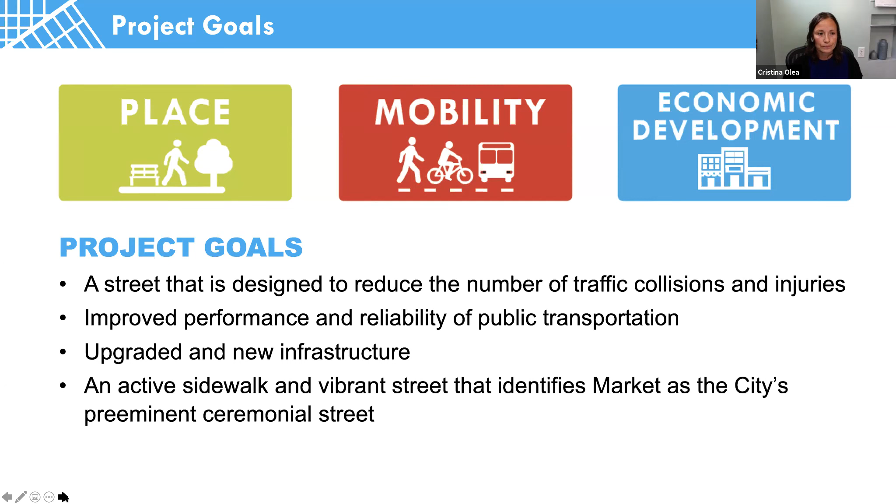We do have some difficult design changes that we're presenting this month to our stakeholders. Those changes were not made lightly and are based on a few different things that have happened since the last time that we met. As you know, in January, Market Street went car-free as part of our implementation of Quick Build.

Immediately following Quick Build's implementation, we saw up to 12% reduction in Muni travel time. And we also saw a 25% increase in cycling along the corridor. That was until shelter in place was ordered. But we were seeing up to 800 bicyclists in the peak hour.

This growth of bicycle volumes on Market Street made it very clear to us that our proposed 8-foot sidewalk level bikeway would be under capacity from day one. That 8-foot bikeway narrowed often to 5 or 6 feet at pinch points like BART Muni entrances, loading zones, and where we had center boarding islands. So we knew it wasn't going to be adequate.

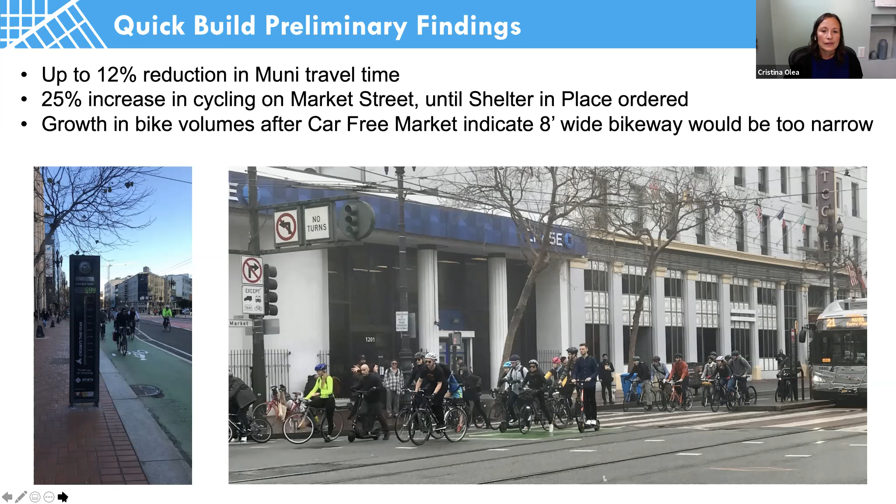We were also hit by COVID-19, and our city has been devastated by its impacts. The economy along Market Street and throughout the city has been severely impacted. Our city budget has also had dramatic impacts because of COVID-19.

Our reevaluation of our design has helped us realign the design with the available funding for this first phase of construction. We also have a much smaller transit system right now, transit operations, when it was reduced to the core service plan. And even though lines have been added back, we are still under a reduced service plan.

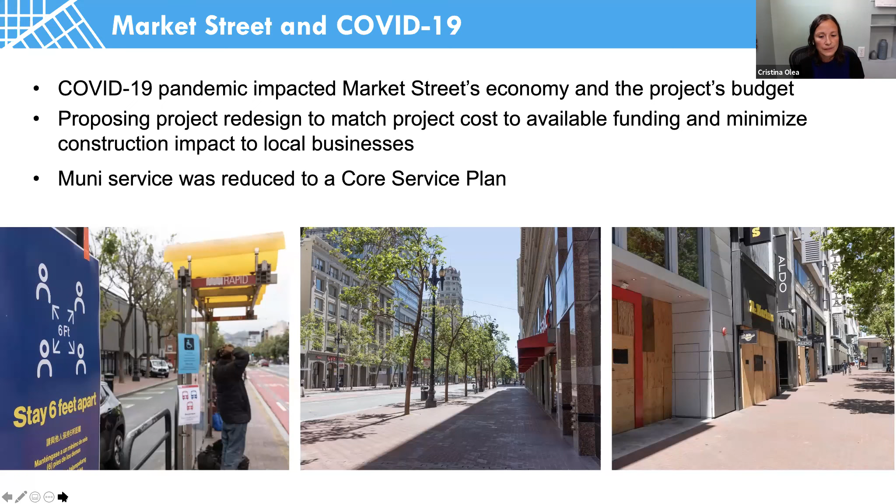The third consideration as we looked at Better Market Street was trying to minimize impacts to our local businesses from construction and to support their recovery post-COVID-19. Some of the key strategies to do this are keeping the existing curb line as much as possible, replacing all of the curb ramps to meet our standards, but limiting the sidewalk replacement to only where it's needed most, and replacing broken bricks mid-block. We've also decided to defer or delay replacement of the Path of Gold poles and the traction power duct banks, since they still have 10 to 15 years of useful life. This work, the utility relocation and replacing the brick sidewalks, really were adding to the construction duration and would most significantly impact businesses.

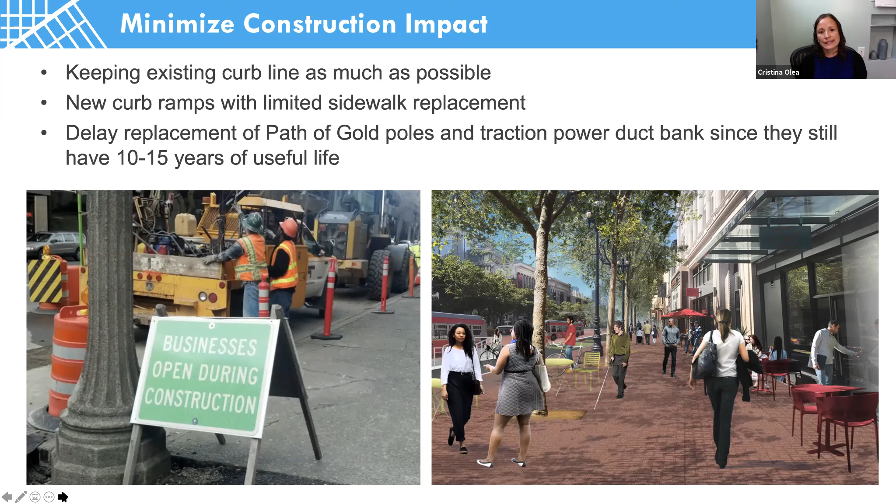Shifting gears now to the design itself, we're going to start at UN Plaza and describe some of the transit improvements that we're proposing. One of the biggest changes to the 2020 design is that all transit will operate in the center Muni-only lanes. So the F line and all of the bus routes will share that center lane. This means that there will be no Muni service in the curb lane and no curbside transit stops, which eliminates conflicts between buses and people bicycling, and also eliminates conflicts between passengers and the bikeway.

All the center boarding islands will be fully accessible with the mini high platforms for people in wheelchairs and with disabilities to board the F-line trains. And the islands themselves will be twice as big. They will be wider and longer, wider to accommodate more passengers and longer to accommodate more buses at each of the stops.

Passengers will cross to the boarding islands at signalized crossings. As you can see here, this mid-block crosswalk between UN Plaza and 1155 Market is fully signalized today. All the traffic signals will be fully upgraded as part of Better Market Street, and any passengers waiting to get to and from the center island would cross at this signalized location.

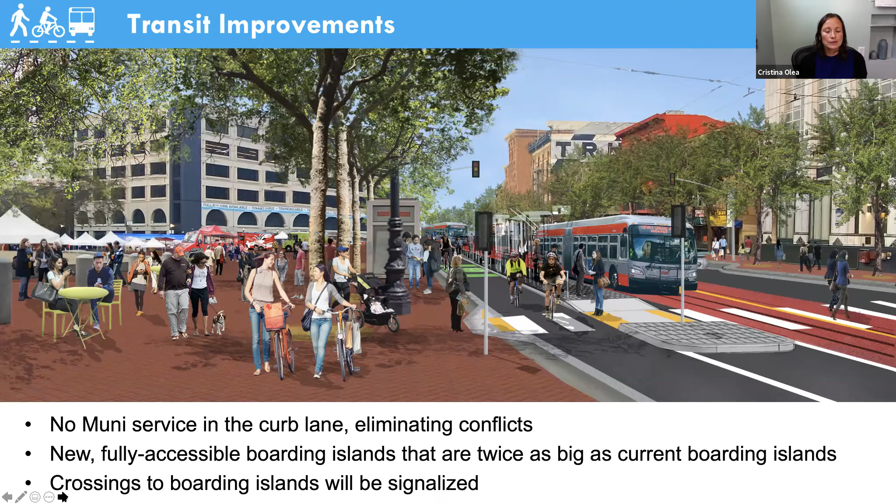With transit in the center lanes, this means that people on bicycles will get full use of a shared curb lane. That curb lane will be shared with taxis, delivery vehicles, and paratransit, but we'll get the full 11-foot lane for cycling. One of the things that we've done based on direct input from our key stakeholders is to add treatments that provide additional safety and additional separation to people bicycling.

So you can see in this rendering that we've added a 2-foot painted buffer between the vehicle lanes, so between the Muni-only lane and the shared curb lane. Within that painted buffer, we've added raised curbs to discourage people or drivers from switching lanes. And we're also adding speed tables, which you can see in the gray shading between the bicycles there. The speed tables have several benefits.

First, to traffic calm the curb lane and ensure that speeds are low in the curb lane. They also will discourage drivers from turning onto Market Street. We're trying to develop a design that is self-enforcing. And if vehicles turn onto Market Street but have speed tables, they will be going slower and hopefully will be discouraged from using it as through traffic. And then we also have a double sharrow to indicate the presence of bicycles through the whole lane.

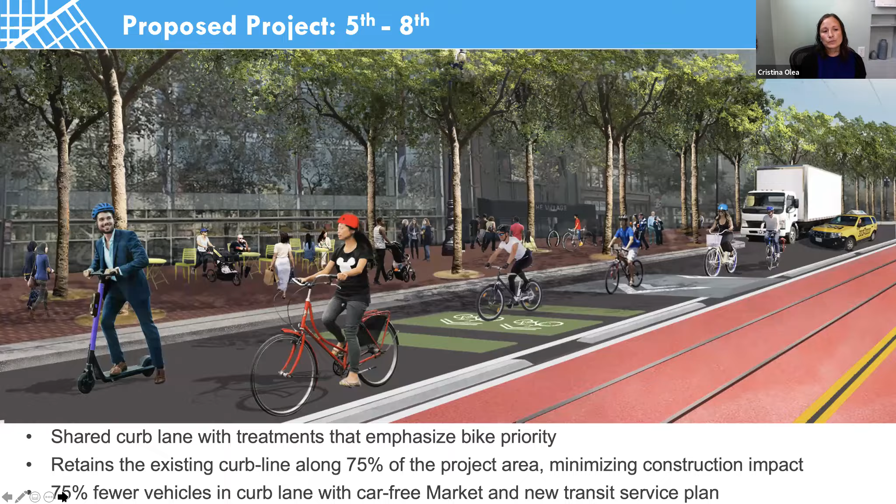Here's a little bit more on the raised curbs and the speed tables. You can see where the speed tables are placed in the curb lane, and the raised curb is in the painted buffer. So this is a sample block between 7th and 8th Streets. You see there's 2 speed tables in each direction, and the buffers are highlighted in the orange lines.

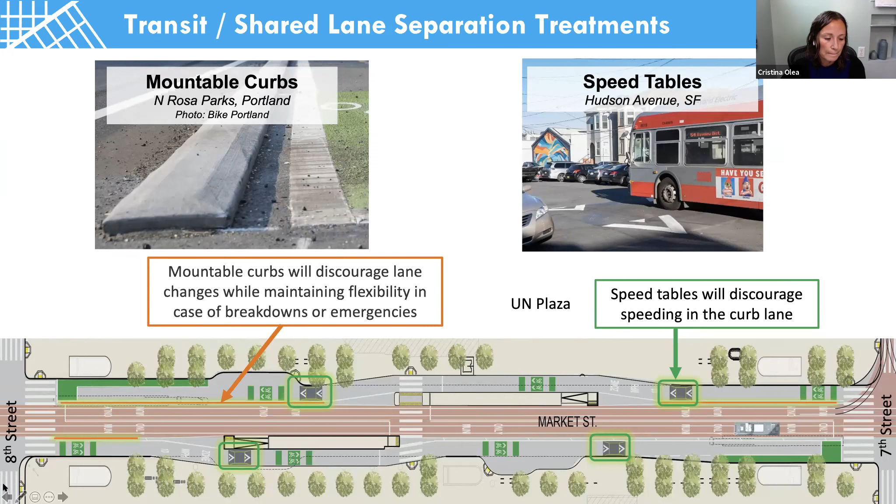To highlight some of the safety improvements for people walking and accessibility.

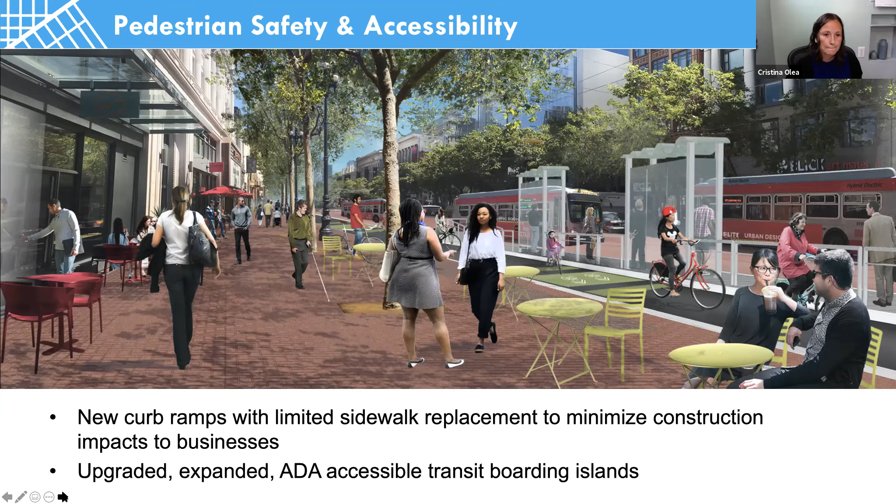This is a comparison from our 2019 design to the 2020 design. You can see on the left in the 2019 design, we were actually widening the sidewalk by 2 feet, but repurposing the first 12 feet for a 4-foot buffer and an 8-foot bikeway. The sidewalk was narrowed by 10 feet to 25 feet. We had 2 lanes in the roadway, 11 feet and 12 feet, with transit in both of those lanes.

The 2020 design on the right has a 35-foot sidewalk for people walking, the 11-foot shared curb lane with bicycles, taxis, commercial vehicles, and paratransit, the 2-foot buffer with the raised curb, and the 12-foot Muni-only lane.

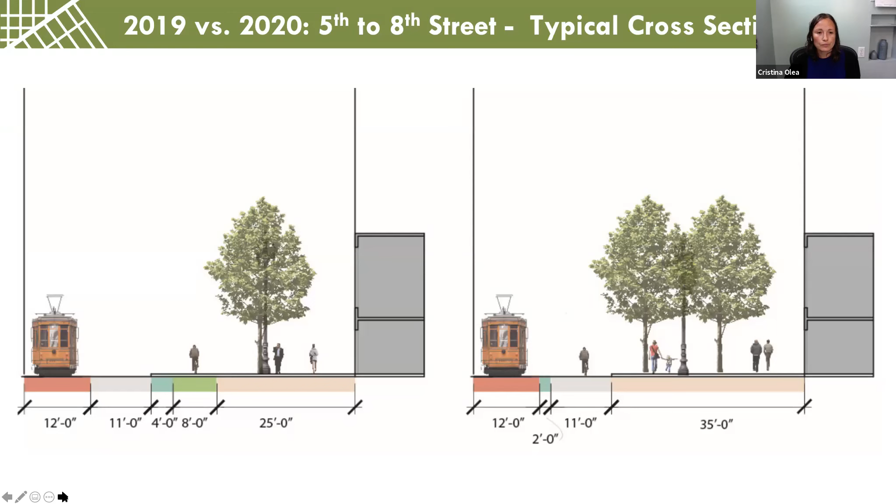This is an example of the 2019 design and all of the locations where the bikeway narrowed. I mentioned that at BART portals, loading zones, and curbside transit stops, the bikeway narrowed to 5 or 6 feet. You can see between 7th and 8th Streets where we have UN Plaza, there really was just a small portion of the bikeway that was the full 8 feet, because we have BART entrances, BART Muni entrances at both ends of the block and mid-block.

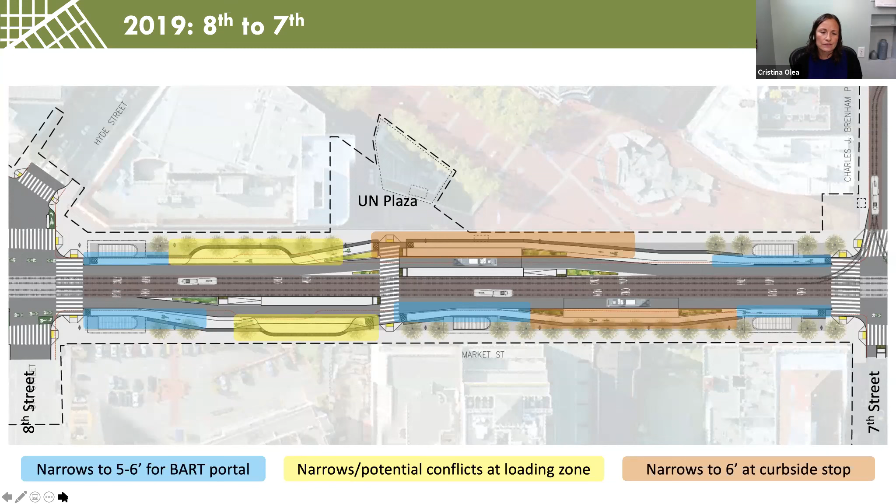And then we had loading zones on both sides of the street and curbside stops on both sides of the street. So we really had 8 feet in very limited locations.

I'm going to shift now to the funding plan and some of the cost estimates. This is our full funding plan for all of Better Market Street. The planning phase, including 30% design and environmental review, and the design of the sidewalk level bikeway is shown in gray because that funding has already been expended. We use primarily local funds to complete environmental review and our planning phase, as well as to design the sidewalk level bikeway.

With this new proposed design, we do have to go back and change a lot of the design, or redesign, between 5th and 8th Streets. So we estimate that that redesign will cost an additional $7 million to the project, but we'll save much more than that with the new design.

We have $121 million for construction between 5th and 8th Streets, primarily using MTA's Prop A general obligation bond, but we also have $18 million in federal funds, $15 million from Build, and another $3.4 million from One Bay Area Grant, or OBAG. We're also getting almost $12 million from our Prop K half-cent sales tax, administered by the Transportation Authority. Most recently, we received an affordable housing and sustainable communities grant of almost $3 million.

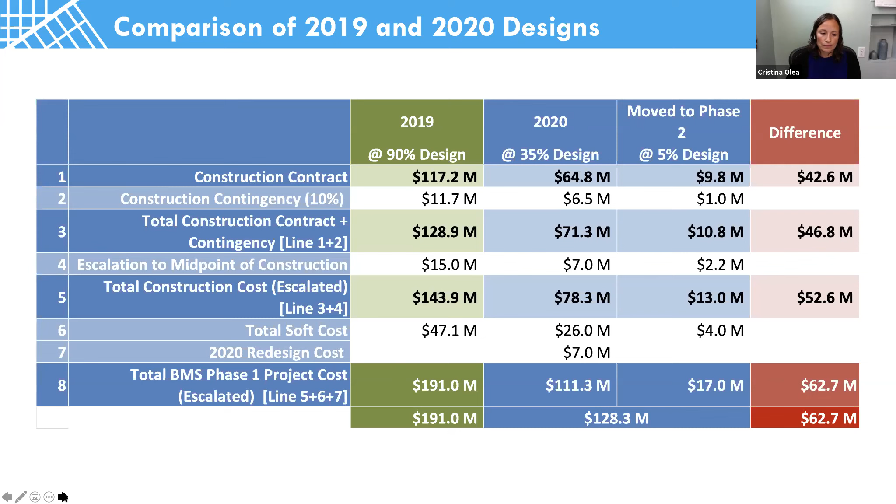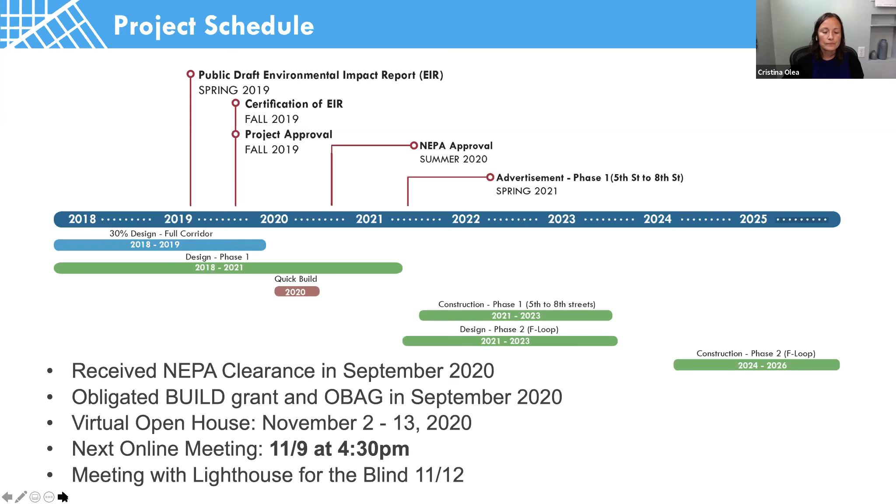Just a look forward to what's next after Market Street between 5th to 8th. Phase 2 is the F Loop, so new streetcar track along McAllister and Charles J. Brenham. We will also be upgrading Market Street between McAllister and Charles J. Brenham as part of this contract.

So this was phase 2 in the cost estimate. This new streetcar track will allow the F-line streetcar to circle back and service the waterfront, where ridership is the highest, more often without reducing service to the Castro.

Also, west of 8th Street, we are still planning to implement the hub area design. East of 5th Street, we're not sure yet what that design will look like. We're waiting just a little bit for the transportation recovery plan to know what the transit operations plan will be east of 5th Street.

But we're also aware of the fact that we may have different cross sections of Better Market Street in different areas, similar to what we have today and similar to what we were proposing in 2019, because the hub area design was always different from the rest of the corridor, narrowing to just one lane in each direction, which is the Muni-only lane.

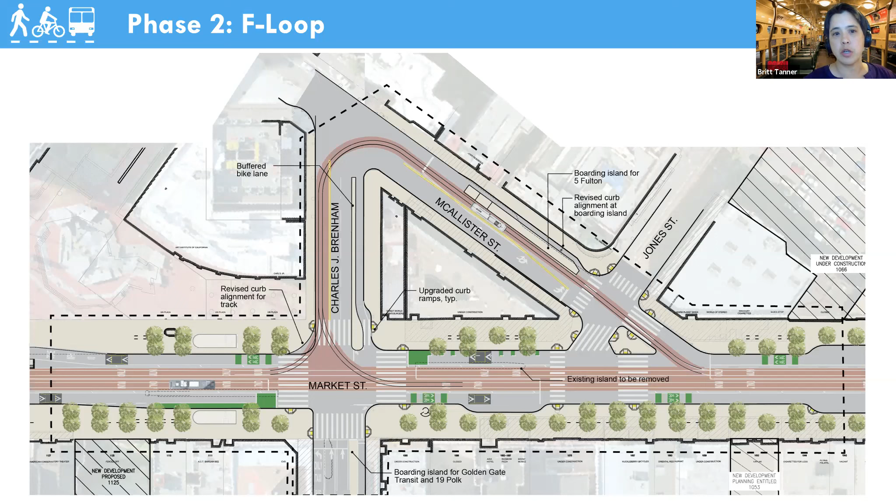But also, having that curve right there presented an issue for bikes coming in off of McAllister, and it would have created an awkward curve that people biking would have had to cross at a strange angle, so there was a chance they would wipe out on that. Also, as you can see in this drawing, there's a crosswalk on the west side of Market just south of Jones that we are opening up. That crosswalk is currently closed, it's next to the word 'existing.' We were not able to open it up when we had that turnback track turning off Market there, because there would have been a switch in the crosswalk, which would have been a hazard. So for all of those reasons, we determined it was best to remove that additional turnback option that was going to be very rarely used.

Can I follow up on 2 of those points? I believe we are only giving people 2 minutes to speak, and there are still 9 people in the queue.

Okay, can I, David, just get a phone number then for Christina? David, I don't even have my new phone number memorized. I'm sorry, but okay, I will find it and I will call you. Thank you very much. Okay, thank you. Sorry, David. Thank you, David.

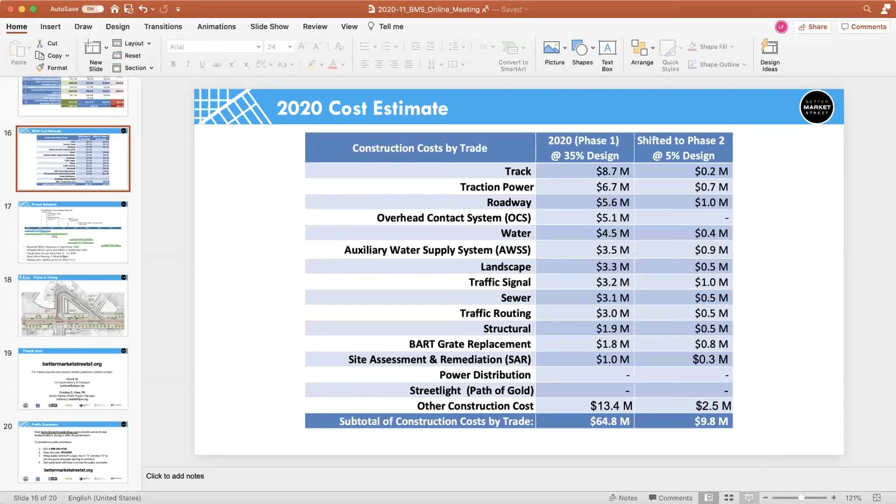I guess I just don't understand why there's such a desire to move forward so quickly with 3 blocks when looking at Van Ness, looking at 2nd Street, looking at so many of DPW's projects. I can't trust you to ever finish the rest of Market Street. Thank you.

Again, we're short on time, but I put the slide back up with construction costs. The cost is not connected to the length of the project. It is connected to the amount of work that we are doing. So fully replacing all the streetcar track between 5th and 8th Streets, replacing the traction power system, repaving both the curbway and the trackway, replacing all of the overhead wires, replacing water and sewer lines, and lining or repairing some of the existing pipes, the auxiliary water supply system. So we still have a lot of work that is happening within these 3 blocks, primarily between the curbs. But it is just how it adds up.

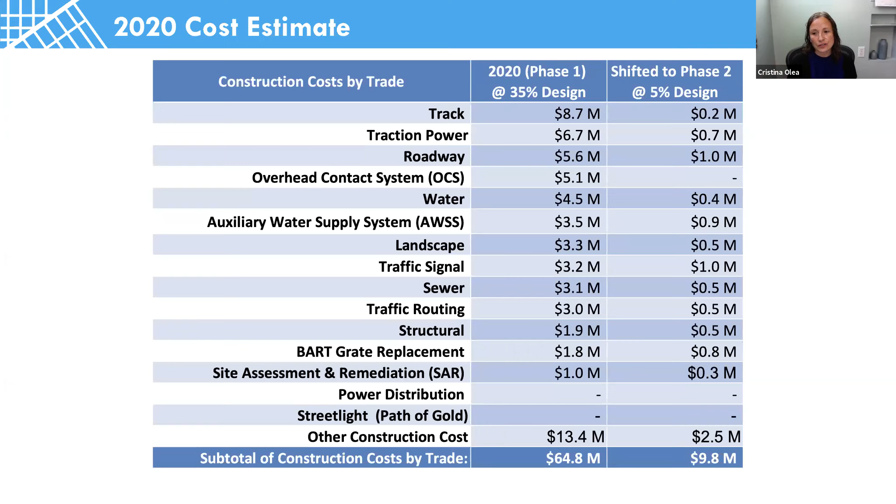It makes me think of like my credit card. Every time I get my credit card bill, it's like, how did this get so high? And you just kind of look at your grocery, how much you spent at the grocery store and how much you spent on a few items, and it quickly adds up. And that sort of, this is the breakdown of all of the work and all of the funding that is going towards repairing and replacing our infrastructure. Thank you.

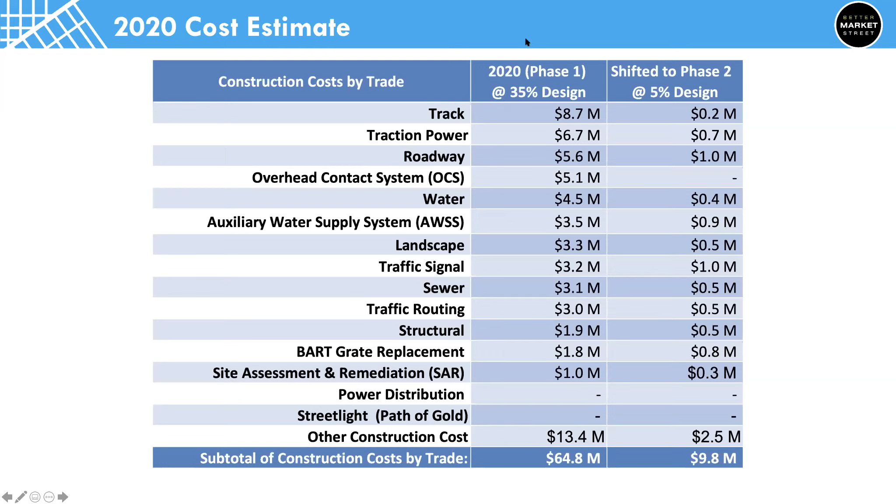Hi, I'm Kelly Shields. I am primarily a bicyclist. I'm also a pedestrian and I use public transit. A car-free Market Street was a major improvement for our city, but this newly revised plan is dangerous for cyclists. We need dedicated bike lanes and we need truly car-free spaces. I have a 13-month-old baby, and the revised plan does not adequately address pedestrian or bicycle safety. It puts us in greater danger while we are biking and walking along Market Street. I'm asking that you bring back the better designs that were a decade in the making and make Market Street a better, more reliable, safer space for everybody. Thank you.